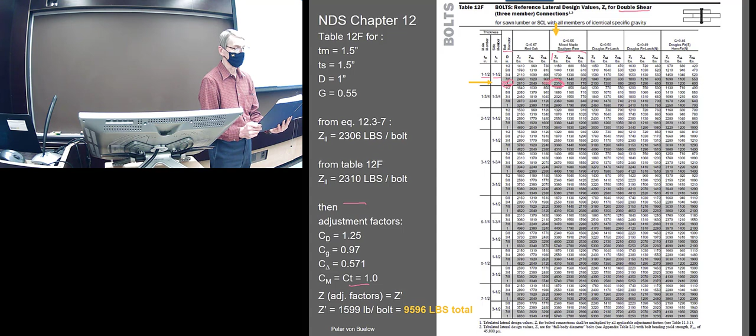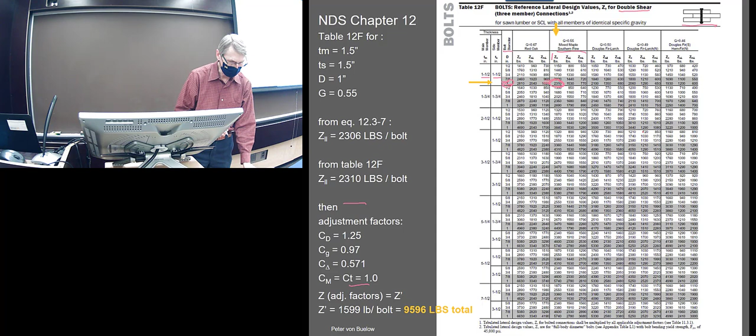Let me see here. Oh, I wanted to make one little comment about where we ended the other day. We went through all those equations, and particularly for the bolt, there are like a dozen different equations you have to check for different modes of failure on the bolt. But in the end, you just have to pay attention to the kind of shear - up in the corner they'll have a picture of it. This is right out of the NDS, actually, it's in this chapter 12.

Sometimes they're single shear - some of them are rated for single shear, some of them are double shear, so they do separate them like that. And then, of course, by the main member and the side member, you have to pick the right sizes. So we did that, and we got a number. And you have to pick your density - this is not really the strength they're looking at, I don't think, so much as the density readings there.

And then you pick a number. That number, I realized afterwards I hadn't really pointed out, does not have the adjustment factors on it. So you still have to multiply that times the adjustment factors, right? So, which you could do, and you get a number then for the total.

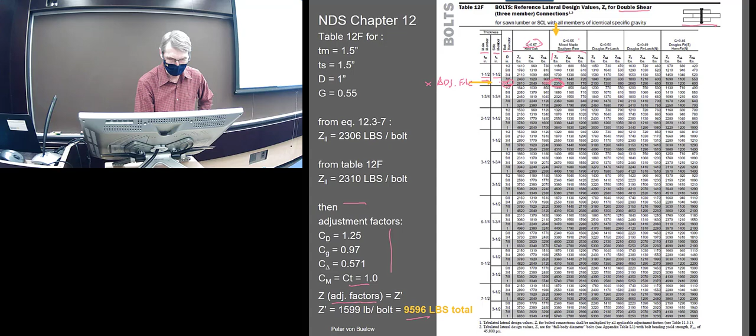This is times the number of bolts, right? Times, in our case, 6 for the bolts. There were 6 on the side.

Okay, so that actually, with the tables, is a very simple thing to check, and those are all the NDS tables, and that's what gave us, I guess, in the end, this. So this was the one that was from the bolts. Theirs is slightly rounded off more than mine. I don't hit their number exactly, but it was pretty close, within 2%.

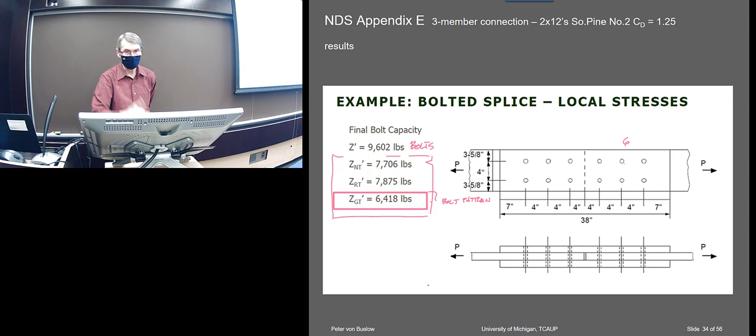And this is the 6 bolts we got that got multiplied in the end. But you look at all these were coming from, I think this was maybe the group tear out, I forget now. But these are the different tear outs, right? These modes are for the pattern, the bolt pattern, not the bolt itself, right, that fails. So it's a lot to check, but there are a lot of different possible modes of failure for that. So that's how that works.

Okay, and then just a few more comments about do's and don'ts. Of course, wood is very susceptible to splitting, and this is one of the main considerations in designing connections, so you don't load it so that it splits.

So, for example, some of the things you wouldn't immediately think about - this right here is not a good way to load that because you can imagine that split right there when you load it, right? It's gonna do that. So it's better to load it from below, let it sit on something. So these would be examples of that.

Here's the split coming from something like that. You have to realize in advance and have the wood sit on the base of it like this. And here they've also got a little pad under it to protect it from the moisture in the concrete.

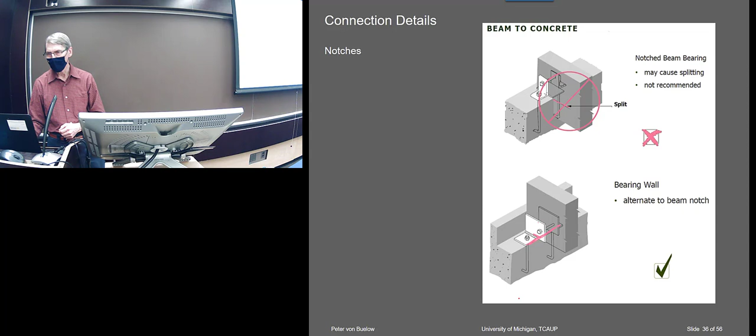I don't know if I told you that story of the Josaphat church I inspected in Detroit - I told you that, yeah. The whole problem with that was they set the sill plate directly on the masonry, and in that case the masonry really did get wet. There was a lot of flooding, and that ultimately rotted out that sill plate.

But anyway, if possible. And then other situations where moisture is a problem - and you see it pretty frequently, I don't know why people don't think of it. Over at Domino Farms, that big long Frank Lloyd Wright building, the roof comes down very low and projects with glulam pieces out along the side, and this is exactly the problem they have. It looks just like that.

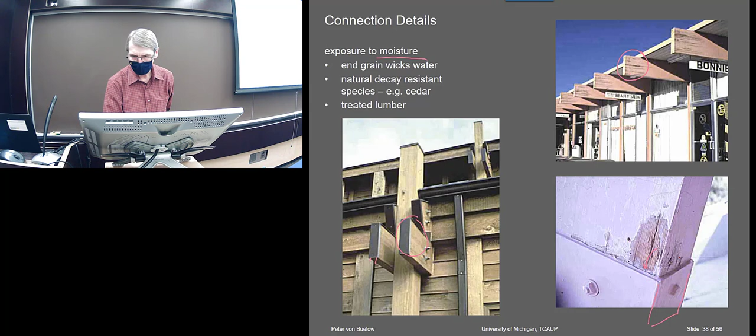And when you design these, you have to be a little bit careful to think of the water getting out. You have to leave some holes down here or something so that if water seeps in, from rain blowing on it from different directions, it can escape. The important thing is you don't want to capture that water - it has to get out. So this was, I think, a column detail, and it undoubtedly captured the water, or the water got in here and couldn't get out, and then starts that rot.

Let's see, here's some other do's and don'ts. This is one where it did exactly that. They've got a bolt at the bottom and at the top. So that's going to potentially cause a split if that wood shrinks. So that's not a good solution. One way to avoid it is to put these slots in. It's a little bit hard to see, these are fuzzy, but you can slot the connection. I think these came from APA, where I got these images.

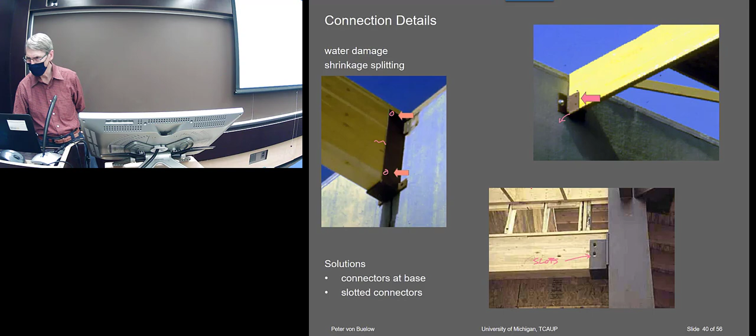These were some other examples. This is a column again with no, it should have some holes down here or something. Simpson now makes some really nice ones, I think they're gauged like for a 4x4, but they have a hollow riser on the bottom that the wood sits up on by half an inch, and then there are holes in it so that the wood's first lifted up off of the concrete, and if water gets into it, it gets back out. So that's a good solution.

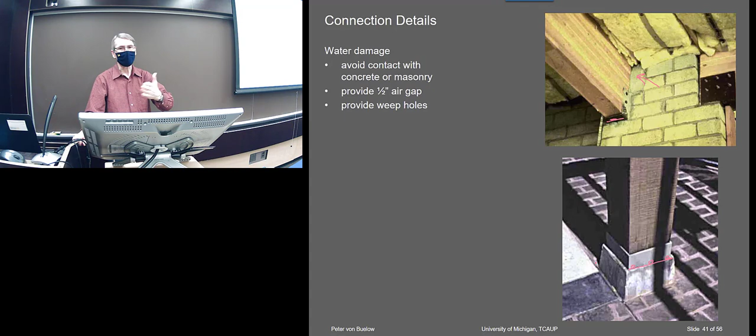They figured that out. This is one that might have been okay originally. It was protected down here, but then somebody filled it in with mortar right up against the wood. So in doing that, the mortar is going to transmit the moisture again to the wood. So that was probably not a good detail. I think APA was saying a half-inch air gap. Okay, wow, that's quite a bit, but there's got to be some gap there for sure.

There's no need to bring that. I mean, it's not strengthening anything to fill that in, but I don't know. Maybe they did it for air drafts or something, or probably just because it was convenient, easy to do, and didn't think about it.

Here's another big one. I think maybe we saw something like this in an earlier slide where they had the column in place and it was fine, and then they cast a floor over it. You'll see this sometimes in renovations where they'd come through and put a new topping on, and not protect the wood. If it's an older structure, it might be a wood frame, and they'll cast on top of that, and that's going to kill the wood. The moisture is going right into the wood then.

These are better details, of course. Keep the slab below the column, or somehow prevent the moisture from getting on it. Or details like this that have a plate again that separates it. Slotted details also allow expansion or contraction.

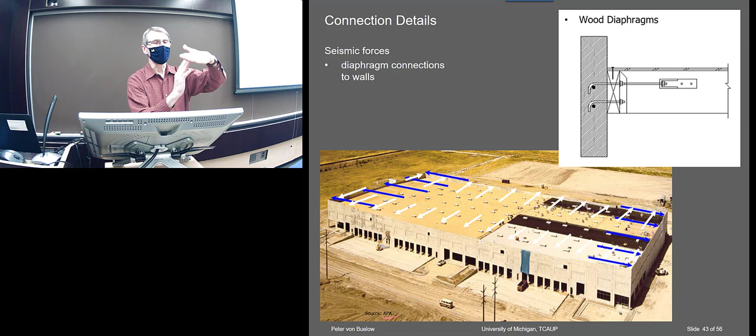These heavy masonry walls are going to move more than the lightweight diaphragm roof. You'll have the roof here, and the inertia from the heavy masonry is going to pull the masonry. So the shock comes, and I guess the shock would go this way. Maybe the masonry would move, or maybe I got it backwards. Anyway, the masonry moves differently than the diaphragm.

And if you've just got them held together, like say you had this plate here and just nailed that diaphragm roof to the support, it would just rip that nail off. It would just pull it apart. So you have to realize there's quite a bit of lateral force in that situation. And what they recommend are these ties, that you have these anchored back into the masonry, and then with multiple fasteners, maybe more than two.

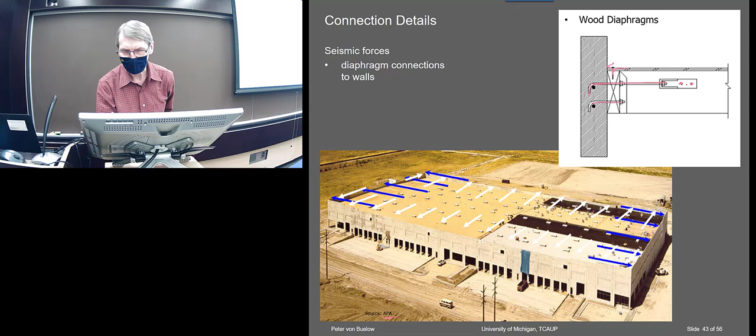In fact, this would be something like one of those fasteners. It's almost like the connectors we saw for shear walls, right? That were doing the same thing. In a shear wall, you've got the wall doing this, right? And you're trying to hold it down. And this is almost the same thing. This wall is pulling away, and you're trying to hold it together. So it's a very similar detail.

And so you've got to have some sort of a connection like that to spread. It's probably more than just two screws. It's probably like half a dozen screws or more that hold that together.

Okay, and talking about shear walls, these we did talk about before. Of course, when it deforms, the panel's going to remain mostly rectangular, and what deforms is the frame behind it. So you get the attachments then ripping apart, right? You've got the panel that remains pretty rigid, and the frame behind it is kind of moving a little bit, and the panels then are remaining square or rectangular, so that it puts a shear force on these edge connectors, particularly more the edge, just geometrically.

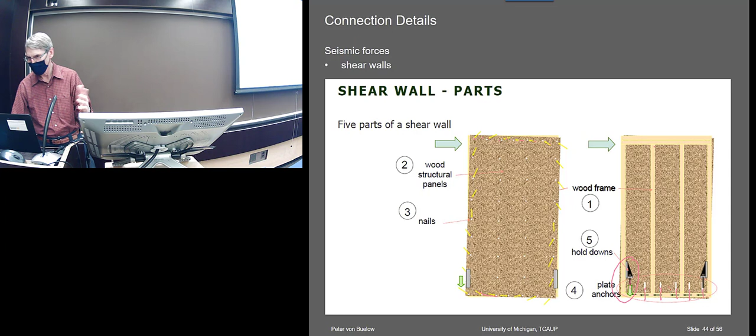So that's a consideration, because there are other options. You can drill it. I think I've got a video at the end here today that shows other options to do those connections. Anyway, okay, so here we go. This just shows a better illustration of why these are the pieces that are carrying it out, right?

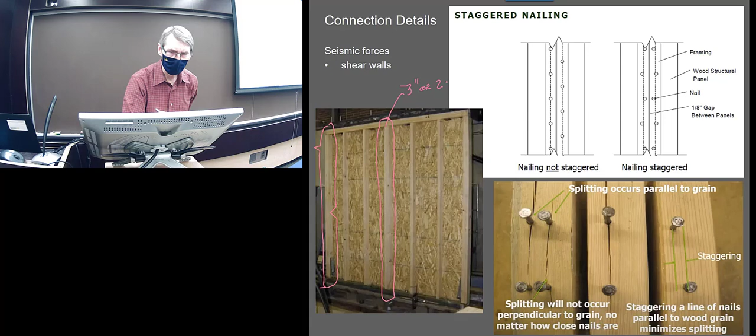The fasteners at the edge, and the sill plate is taking the shear, and then the uplift at the corners. Okay, so that's how those shear panels work. So part of what that was illustrating, these edges are kind of critical, and in the criteria for those, they'll usually say they have to be 3-inch or two 2-inch pieces. Here in Michigan, as far as I know, I don't remember seeing 3-inch pieces very much. Maybe you can order them, but usually they're not available, so it'd be difficult to get a 3-inch piece, but you can use two 2x4s.

And then the nails should be staggered. This was just illustrating what they mean by staggered. This can be a little bit confusing to carpenters, and you may be in the position to inspect it. I don't imagine you'd be out there driving the nails, but you might be walking through inspecting it to see how the job is being done. This is not staggered. Even though it kind of looks staggered, they're not. The critical part is those are lining up in a straight line, and the danger is that if you follow the grain, you'll split it.

Across the grain you can put them as close as you want this way. The grain's not going to split in that direction. But if they line up in this direction, that's a problem. So lining up in this direction is no issue; it's this direction that you've got to watch. It's okay to have them lined up that way. But here is what the stagger's about. It's not a lot of stagger, but at least it hits different grain, so it does make a difference with the wood, trying to avoid that splitting.

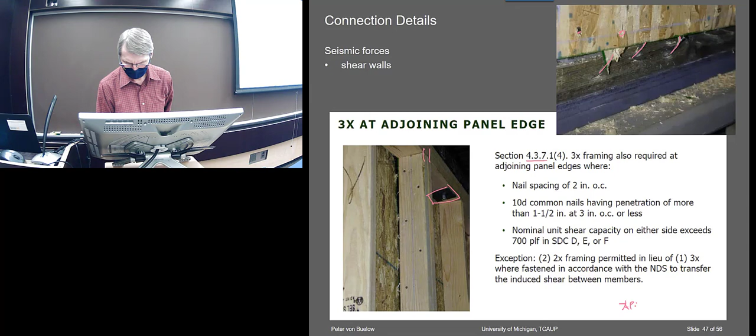Then this just gives the details. I thought this was the NDS criteria, but no, I take that back. This must be more of APA's; I got these out of APA's literature. 2-inch spacing, 10 penny nails. So they're pretty explicit on the details of those. And you can remember when we looked at shear walls, they had the spacing and everything in some of those tables.

They also talk about joining edges. So there's an edge and there's an edge. This is a little bit difficult to stipulate in your drawings. I don't see how you'd really manage that, but you could give it as a written specification and then try to pay attention. It's difficult to see though because it's on opposite sides of the wall, and by the time you get out to the site, it's covered. But if you have staggered joints, then you can just do them on a 2x4. If they line up, then you're supposed to use the 3-inch framing or two 2x4s.

Right? Okay, I gotta get a new pen, I guess. This thing's about illegible.

Okay, so that's another detail. Now, let's see if I got this video here.

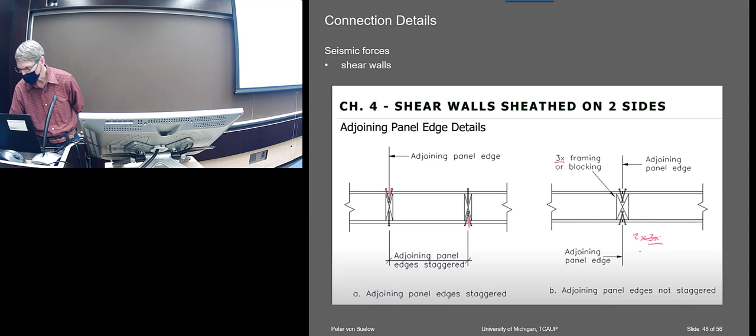You can adjust the spacing. If you got those 2x4s 12 inches on center, that's a pretty strong wall, you wouldn't need to go to a 2x6. But the 2x6 gives you a larger plenum, a little bit of space, which for plumbing would be useful. What I hadn't really thought about, but what this guy was pointing out, is people do it in higher priced homes to put more insulation in there. You have a thicker panel to have more insulation, and his argument is that's not a very good way to do the insulation.

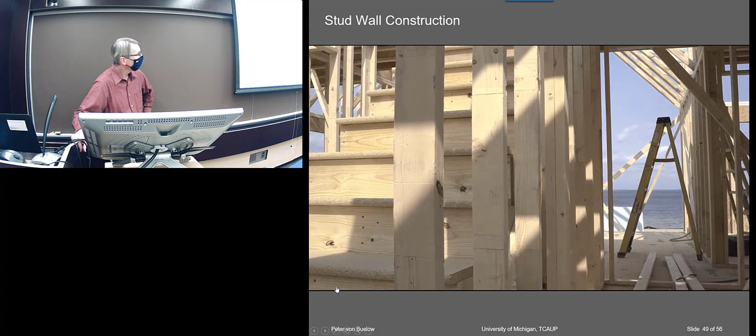I'm just getting a regular stud, and if you've ever gone through a bunk of studs, you'll see you got to throw out probably 30 or 40 out of each bunk. My worry is one of those gets in the wall, and then we've got a problem. If it's in your kitchen, your countertops and cabinets don't want to sit right, because it's typically warped.

That's why I've stayed with a 2x4. The value of going to a 2x6, I know, is you've got a bigger wall cavity so you can get more insulation in there. But what typically happens is when you put that insulation inside your house, they're not putting it on the outside like we do. We typically put an inch of styrofoam on the outside of our house, and the reason I like that is it performs as a thermal break, so you don't have the heat going from drywall to your stud to your OSB on the outside and right out of your house.

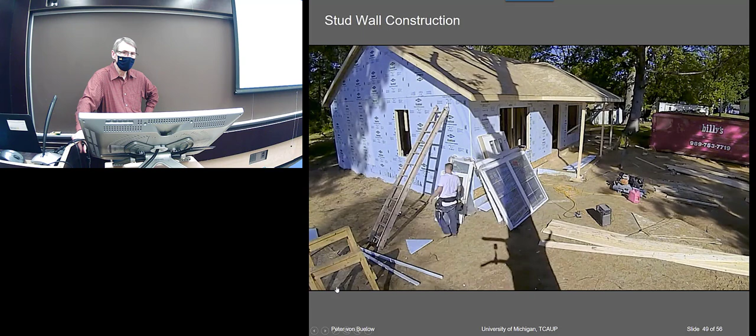If you've ever driven around on a frosty morning, you can tell who doesn't have a thermal break because you can see every stud in their siding, because it's collecting that heat. So that's another reason when you see people build with 2x6, they typically just put a house wrap on the outside because they've got their R value already inside their wall and don't want to spend the extra money on the styrofoam. But that thermal break, I think, is really important energy-wise, you're not soaking energy right out of your house.

And the other comment he made about the finger jointed lumber, I had never really considered that, but apparently that's more stable in terms of warping or deforming.

It's very true. I've gone down to Lowe's trying to buy 2x4s, you pick them up in the pile and go through them and they're not straight. It's hard, you have to sort through them to get a straight one. The problem is you put them up in a wall, and if they're too bad, you've got a bump in the wall. You'll either notice that, or like he was saying, in a situation where you're putting cabinetry around, it can actually be a problem, and then you've got to come back and try to fix that. I think another video I have later shows ways to fix that, but it's kind of a nuisance for sure. It costs you labor to fix it.

Okay, these are some more. Oh, this is out of the IRC and the IBC, the International Building Codes. Their details also have stipulations if you look in there, and usually they just reference the NDS, or they're at least in agreement with them. They had a few details that I noticed that were specifically on joinery.

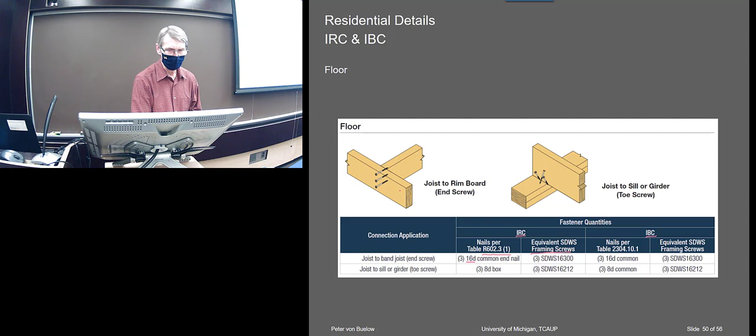Here they're specifying - oops, okay, sorry, let me get back to my pen - they specify the nail size. There's a table giving those nail sizes. They also give equivalent screws if you want to use screws, and they pretty much agree. This was a comparison between the residential code and the International Building Code, and they'll stipulate how those are actually used. So this is just on a floor. This is rim board, of course, screwed or nailed into the end of that.

Get long enough screws. These are details on joining of the top plates. Normally we have a double top plate on a stud wall, and this shows how to do the lap splice. The sole plate is toe-nailed in, and the top plate as well. Again it's giving you the size of these fasteners, most of them 16 or 10 penny. 16 is pretty big - I guess the ones being toe-nailed are usually 16 penny because they have to go through a further distance.

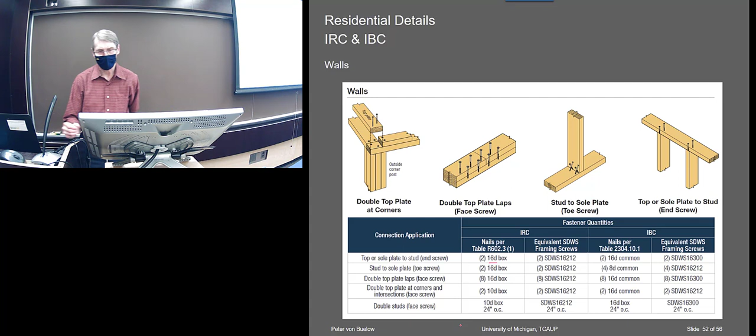Details on rafter construction and that kind of stuff. It's similar, and I guess the most interesting part of these tables to me is seeing what they stipulate as the size of the connectors. I think there's one more - yeah, these are just details on roofs.

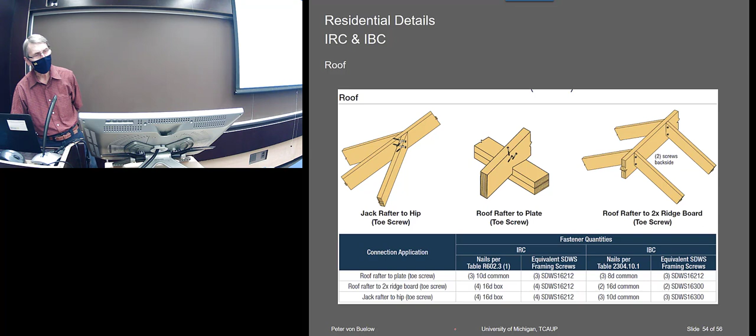And then this was the other video I thought I'd show you. This is from Simpson - let's see if we get my pointer arrow working. This goes through and shows a series of their connectors and examples of in-use applications.

Hello and welcome. Simpson Strong-Tie leads the industry in product innovation, quality, and technical support for structural connectors. In this short video, we'll cover the basics for correctly installing Simpson Strong-Tie connectors. Effectively utilizing these connectors not only makes construction more efficient, it creates a stronger, safer, well-connected structure.

First, making a good connection requires having the right connector. The right connector should be chosen by your architect, engineer, or designer. Our job is to be sure that it is installed correctly. Once the correct connector has been determined, the single most important factor in correct connector installation is the proper use of fasteners. So let's take a look at some of the fastener types used with Simpson Strong-Tie connectors. Depending on the kind of connector chosen, you may use nails, machine bolts, strong drive screws, or Titen masonry screws. But it's more than just the type of fastener that's important for proper connector installation.

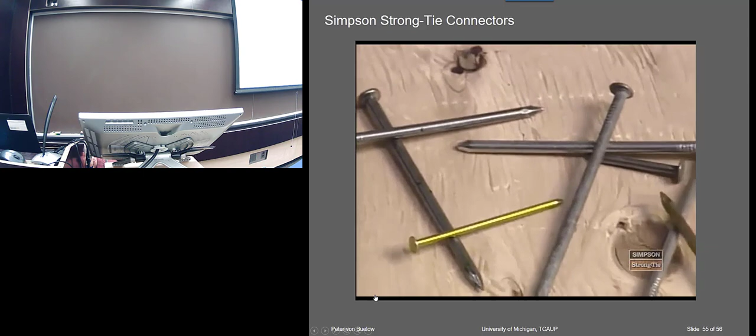So let's look at the most common fastener used with Simpson Strong-Tie connectors, the nail. There are many different types of nails, so make sure you're using the correct one. Fortunately, most Simpson connectors have the required nail stamped right on the product. But if you're unsure, simply refer to the current Simpson connector catalog. Although two nails may look alike, there are three key features of a nail that will affect the performance of a connector: diameter, length, and finish.

The diameter of the nail shank, often referred to as the gauge of the nail, affects the shear capacity of the nail. The thicker the nail, the more shear resistance provided, so be careful - substituting a nail with a smaller diameter shank will reduce the load capacity of the connection. Here are some common nail types with their associated diameter and wire gauge.

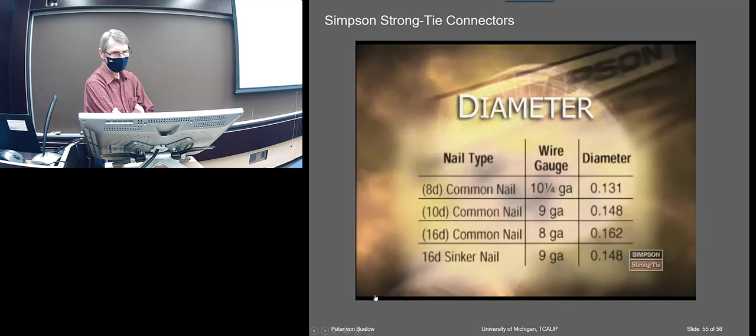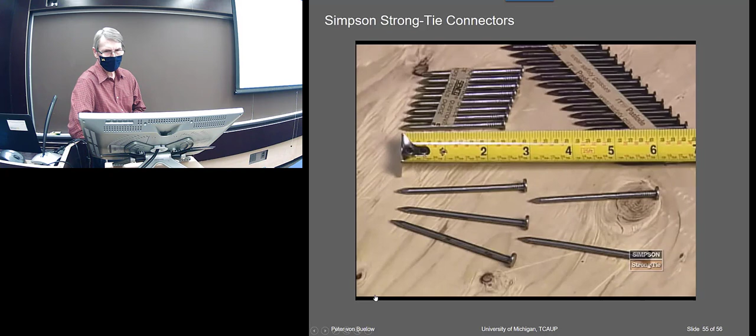The length of the nail is the next most important factor in determining the connector capacity. The reason is simple: nails must have enough penetration into wood to achieve full shear capacity. Here are some common nail types with their associated lengths. Some connectors require full-length nails and cannot use shorter versions. Examples include hangers with double shear nailing and some heavy top flange hangers like the HGLTV. For other products, substituting a shorter nail will result in drastic load reductions. Never use short nails without first verifying whether they will work. Here are some common nail types with their associated minimum penetration lengths.

When using our patented double shear nail hangers, you must use the specified full-length nails. And finally, consider the finish of the nail. Galvanized or stainless steel nails may be required for corrosion resistance. Check with your local building department for specific code requirements.

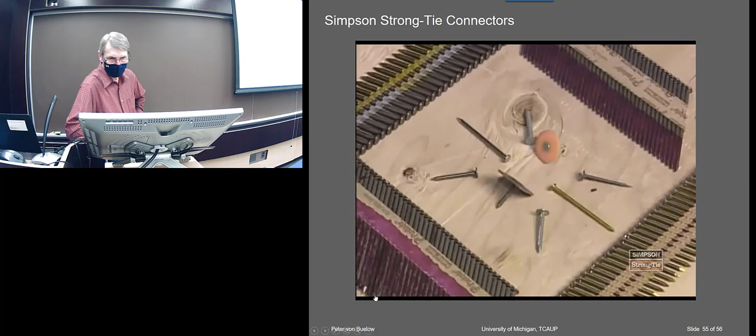It's important to realize that many nails found in lumber yards are not appropriate for use in connectors. Examples include drywall or sheetrock nails, roofing nails, and small common nails like the six-penny nail. These nails lack either the length, thickness, steel composition, or coating needed, and they substantially reduce the load capacity of your connectors. Remember, the incorrect use of fasteners is the single most common mistake made during connector installation.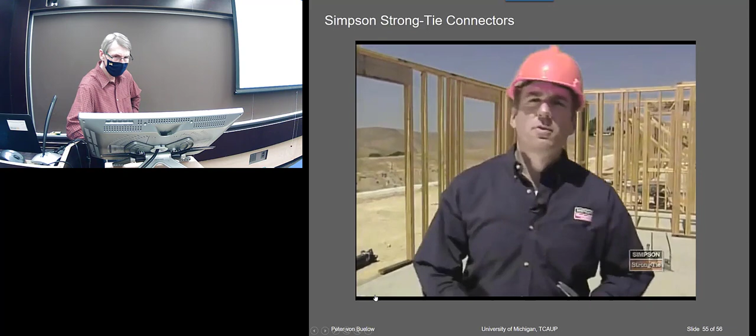Now that we're aware of the importance of using the right nail for each connector, let's talk about installing those nails. A metal claw hammer is still the tool of choice, but palm nailers can also be used, and are a great way of reducing installation time when used with the correct nails. Some pneumatic nailers can also be used, provided they have a nail hole locating mechanism and they use the correct nail for the connection.

Do not overdrive the nails. The nail head should be seated flush with the steel. Keep in mind that most standard framing nailers cannot locate holes and therefore should not be used to install nails into connectors. And since most collated nails for standard framing nailers are undersized, they should not be used to install connectors.

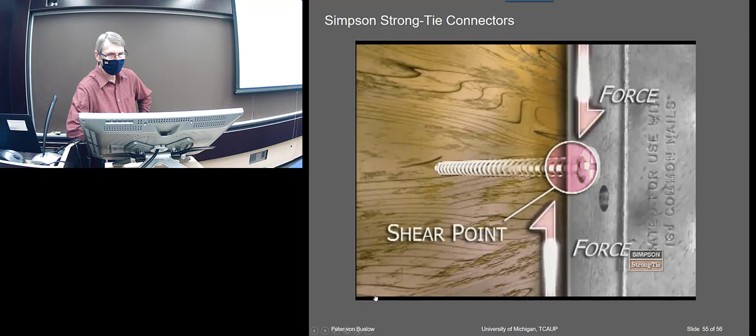Now let's talk about screws. Since screws act differently than nails, they cannot be interchanged. Screws are often tempered, which makes them brittle, and therefore will not yield the shear strength that nails provide. Examples of common screws not suitable for connectors include drywall screws, deck screws, and lag screws. But Simpson makes a patented screw called the SDS, or Strong Drive Screw, that is code listed, needs no pre-drilling, and comes with the connectors that require them.

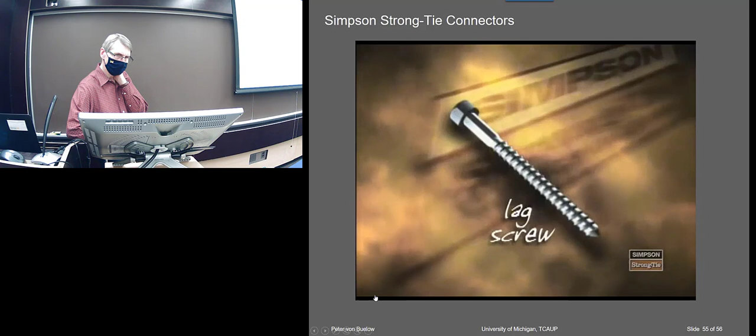But beware, do not mistake an SDS screw for a lag screw. A lag screw will not achieve the same loads as an SDS screw and is not allowed with Simpson Strong-Tie connectors. And finally, for those connectors designed for use with masonry screws, remember to pre-drill those holes to the required diameter and depth for correct installation. The drill bit diameter can be found on the packet of screws, and it must be drilled at least 1/2 inch deeper than the screw length.

Now let's talk about machine bolts. They should of course be pre-drilled to a diameter only 1/16 of an inch larger than the bolt itself, and they require a washer on the wood side of the connection. Carriage bolts, lag screws, and all-thread rods cannot be used in place of machine bolts. It's important to remember, a pre-drilled hole that's too big for the bolt will compromise the integrity of the wood and make for a weak connection.

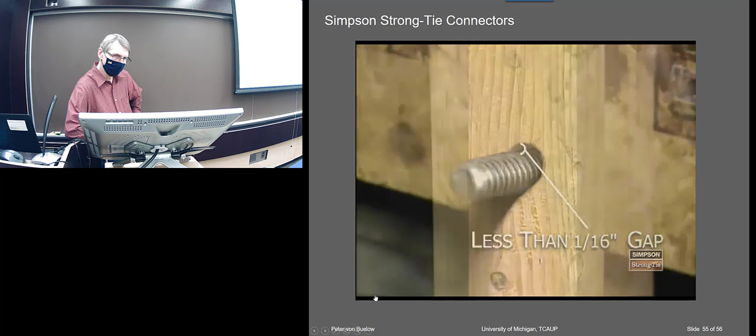Since repairs for poorly drilled holes can be costly, make sure the drill bit is of the right diameter, it's not bent, and you drill the hole from one side. Don't try to meet the hole in the middle by drilling from both sides.

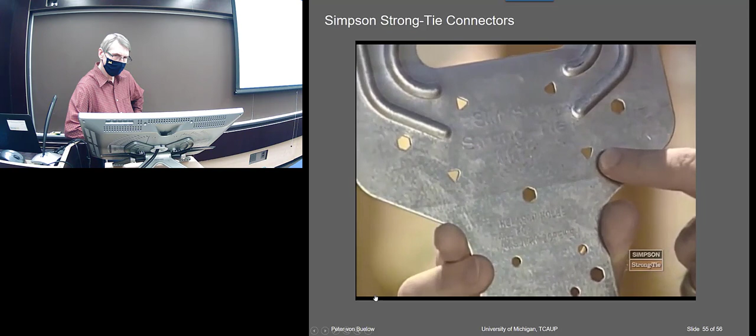You probably noticed that Simpson Strong-Tie has different shaped holes throughout its product line. You'll see round, oblong, triangular, diamond, and hexagonal shaped holes in our connectors. But what do these different hole shapes mean? Well, each different shape indicates a different fastening requirement.

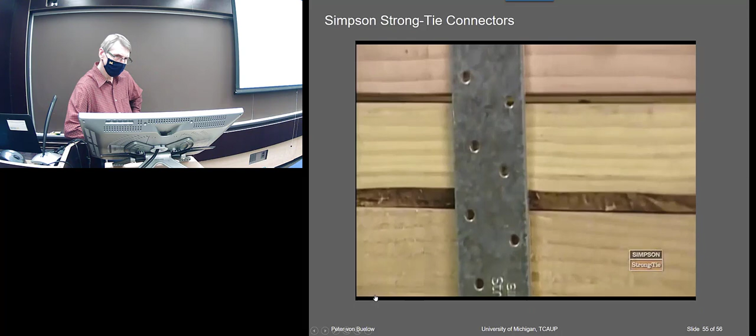The most common shape is the round hole. This hole must be filled with the fastener type specified. The only time you may not fill a round hole is for straps and strap type hangers. These products have more holes than are required to allow for multiple fastening capabilities. Oval or oblong holes are simply used to provide easier access in tight locations and should be treated like round holes. As a general rule, all round and oblong holes should be filled with the appropriate nail.

Triangle holes are used for increased capacity and must be used if specified by the designer. Connectors that have triangle-shaped holes have a minimum and maximum load value. To achieve the minimum load value, you must fill all round holes. To achieve the maximum load, you must fill all round and all triangular holes.

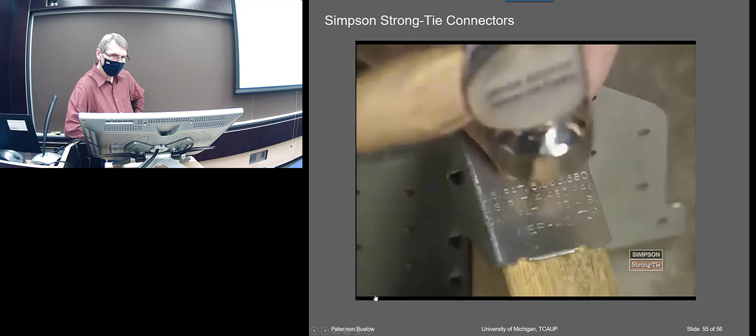Diamond-shaped holes indicate a temporary fastening option and are there to aid installation. It is not required to fill diamond-shaped holes. Hexagon-shaped holes are used exclusively in conjunction with our Titen masonry screws, and these holes must be pre-drilled.

Along with different hole shapes, Strong Tie connectors use a variety of innovative design features to help secure their connectors with greater efficiency and more precision. The most common of these are the patented tabs and domes. Both of these features force the nail at a 45-degree angle, providing correct installation of our double shear nail design.

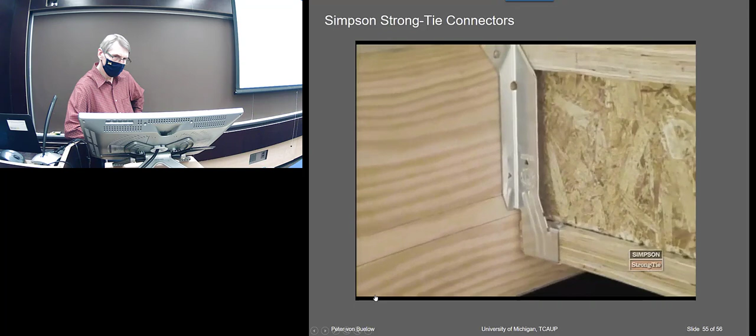Simpson also uses this 45-degree feature with engineered wood product connectors, commonly known as I-joist hangers. This application is referred to as PAN, or positive angle nailing, which forces the nail into the wood at a 45-degree angle, minimizing wood splitting problems. Other I-joist hangers feature a bend tab that locks the hanger to the bottom chord of an I-joist, preventing joist movement and minimizing squeaks in the floor system. Simpson's newest design, the IUS, features a snap-in seat requiring no joist nailing for the fastest possible installation and huge labor savings.

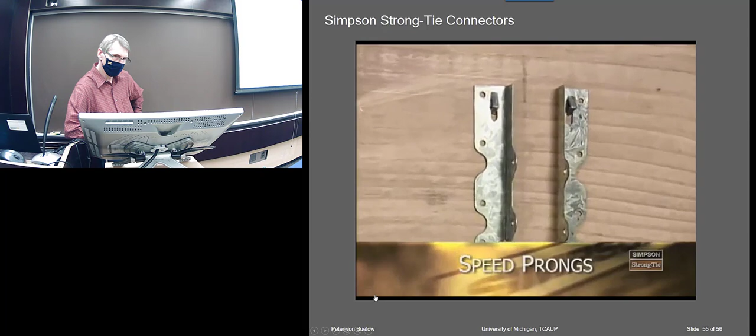Speed prongs are another Strong Tie innovation found on many of our connectors. Since it can be difficult to hold a connector, hammer, and nail all at the same time, these handy prongs are used to temporarily position and secure the connector for faster, easier installation.

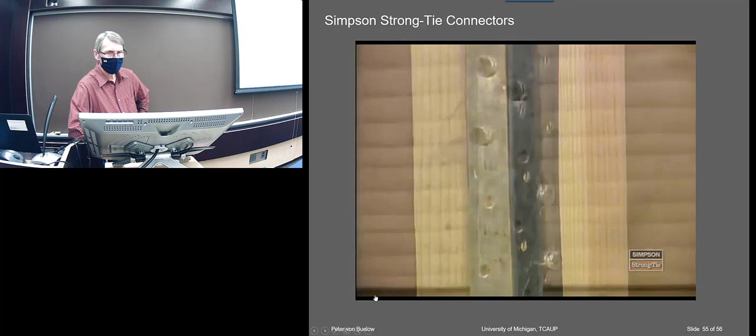Now that the connectors are installed, it's a good idea to check your work. First, verify that all the appropriate holes have been filled with the specified fasteners. If this has not been done properly, it could result in a premature failure of the connection, which may create a life-threatening condition. Once you have determined all required holes have been filled, check both parts of the connection to ensure fasteners are installed into appropriate material, like lumber or masonry, and not into thin air.

So let's take a moment to recap what we've learned. First, we know how important it is to verify that we have the right connector for our construction plans. Second, we learned how important it is to use the proper fastener for those connectors. We learned that nails must be the correct length and diameter, and don't forget to check local agencies for any special corrosion considerations.

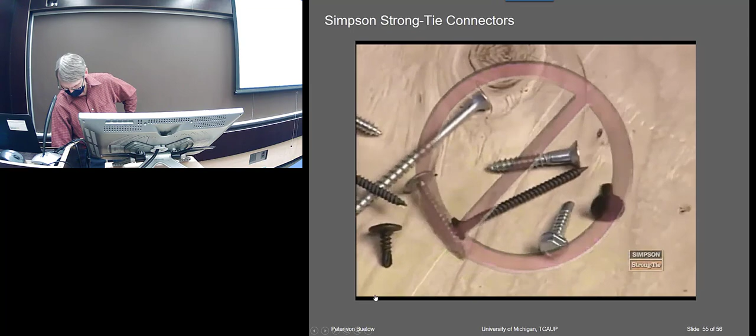For screws, we know that Simpson Strong Tie offers two types of code-listed structurally rated screws, the SDS screw and the Titan masonry screw. The SDS is code-listed as a self-drilling screw, but remember, a lag screw is not an acceptable substitution for an SDS. And because of the base material, it is necessary to pre-drill for proper installation of the Titan masonry screw. We also learned that machine bolts must be pre-drilled to a certain tolerance, and that a carriage bolt or all-thread rod may not be substituted for a machine bolt.

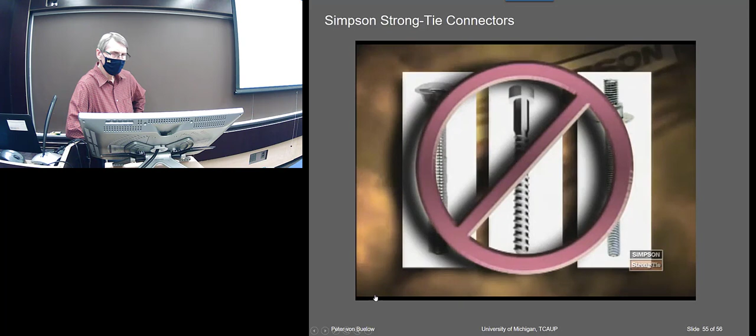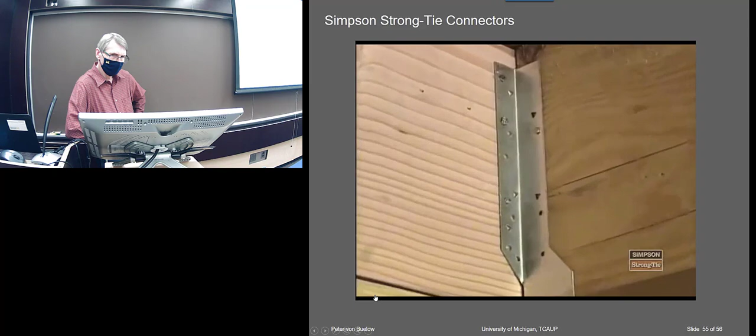In addition to the proper fastener, we know how important it is to use the correct quantity of fasteners. We learned the significance of all the different hole shapes and design features, each representing a different requirement or feature. We learned about innovative features like tabs, domes, pan nailing, and speed prongs, all designed to aid in proper installation. And finally, Simpson Strong Tie connectors can only be as good as the base material to which they are fastened. Make sure that the material is suitable for fastening and will support the load developed by the connector.

After all, Titans, SDSs, and nails can't work if they're not fastened into adequate material. If you're not sure or it's not stamped directly on the connector, remember, all fastener types and quantities can be found in the current Simpson Strong Tie catalog or on the web at www.strongtie.com.

Okay, there's Strong Tie. Yeah, it is interesting there. In terms of inspecting, it makes it very easy to see which holes are not filled. And one comment they had, I don't know if you caught it, where they nailed on the truss where it was not attached, the nails went in but didn't hit the wood, right? They missed the wood. Of course, that's not too good. But the other one was on the insulation, trying to nail through insulation into the wood. Well, that's going to leave that much of the nail unsupported, right? So that's not a good solution either. So, I thought that was an interesting video, a few good do's and don'ts. And oh gosh, we're going to finish early today, I wasn't sure we'd get to this.

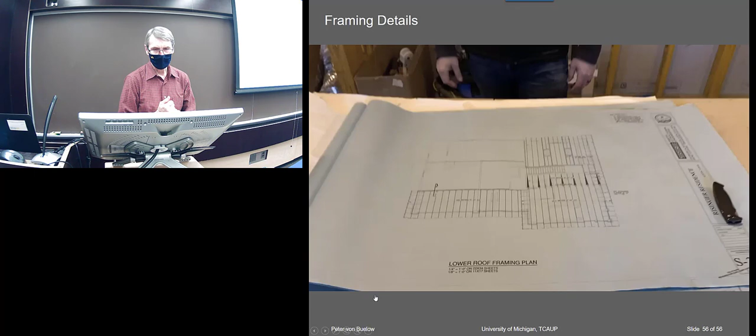This is one other video that I thought was good because he goes through also talking about not just the fasteners, but mentions how to solve some of the details where the wood walls are not straight. You know, that other builder was commenting that he used finger jointed lumber to get straight pieces. And this, they talk about that too here, and how you actually, what you'd have to do if they're not straight. Anyway, this is that guy we saw one of his videos earlier on the Risinger homes. He did the video on the different, what was it, plywood versus OSB, I think. Okay, so let's see if I can get this to play.

The Build Show today, talking about engineering. We're at my house under construction, and I used a couple of very special products that made my house especially strong, but also made it a little easier on me and the framers for construction. We're going to be talking about new construction and remodeling, some tips and products that I think will help you on your next build. Today's video is all about engineering. Let's get going.

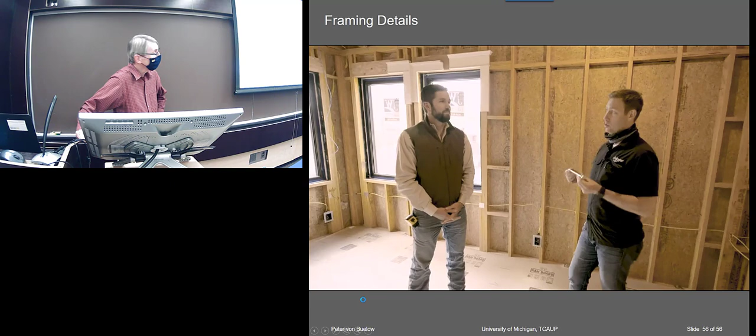All right guys, I got my friend Whit Smith here, the engineer who has worked with me on a bunch of projects in my personal house too. Whit, let's talk about some of the modern hardware available and some of the things we did on this house to make sure, number one, my house was structural, but also to make some of the construction easier.

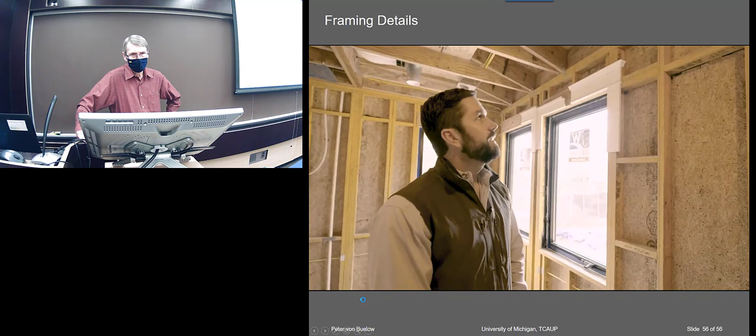So first off, Whit, talk to me about those metal ties going from the top plate to the rafters. Well, these are hurricane ties, and that's how we attach the rafter to the top plate of the wall. And that's not something that's all that new, we've been using those a long time, it's been a couple decades. Most of our framers are going to be very familiar with that. What we're trying to achieve by attaching the rafter to the top plate is a continuous load path to resist wind uplift. So as the wind's trying to grab that overhang, it's holding that roof down to this wall, right? That's correct.

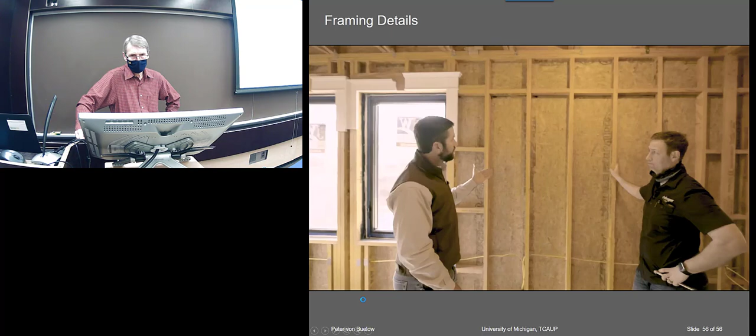And then to maintain that load path, we have to attach the top plate, because eventually we want it connected to the foundation. So we're going to attach the top plate to the studs using our continuous sheathing. As an engineer, we love continuous sheathing because we have shear strength and resistance to uplift throughout the entire home. So shear strength meaning that racking, like when the wind hits one side of the house, it's resisting this kind of movement, right? Exactly. But then this is also helping us with uplift too, is that right?

That's correct. So our sheathing is going to now be attached to our double bottom plate. In this case, it's a double plate due to our floor detail. And then we have to attach the bottom plate to the foundation.

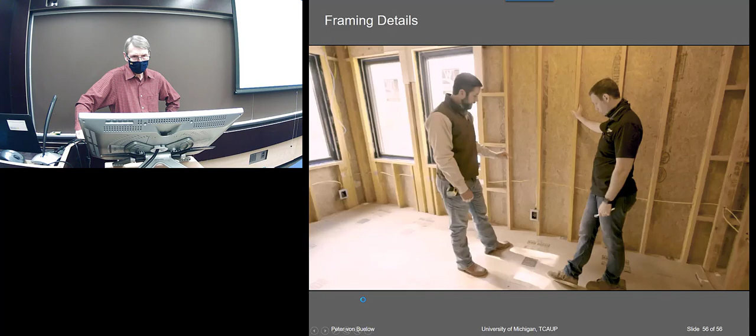Okay, so this is a remodel house with... This was originally a 70s slab, and we've got some new framing on it. When we took the house apart, I realized the bottom plates were power actuated, basically a nail that's shot down through the concrete. But a nail, in effect, that wouldn't give you enough value to hold the house down, is that right? That's correct. And in fact, that doesn't meet code. That's how we would attach an interior wall, but an exterior wall requires half-inch diameter J-bolts most commonly.

In new construction, you're going to see a half-inch diameter J-bolt, or there's a new line of products out that they call mudsill anchors. That's similar to a joist hanger, a light gauge metal hanger that you attach to your concrete form. So you install them before you pour the concrete, wreck your forms, and then you lay your plate down and attach it using that mudsill anchor. It kind of folds over. Exactly.

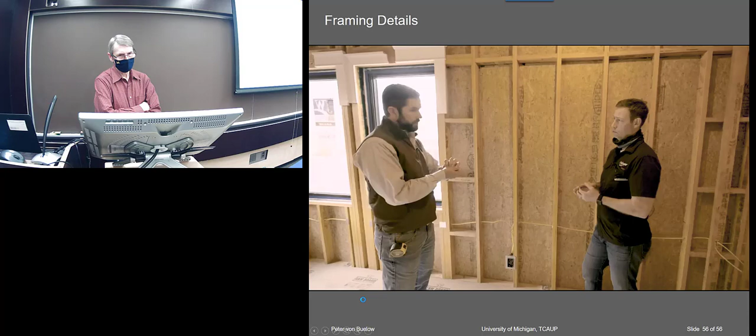Okay, I've seen those. Now that wouldn't have worked in our application here because our foundation was existing, so we had to post-install our anchor bolts. Fortunately, Simpson has options for post-installed application in a 2x4 wall. And what's that product called, Whit? This is a Titan HD, a heavy-duty screw anchor.

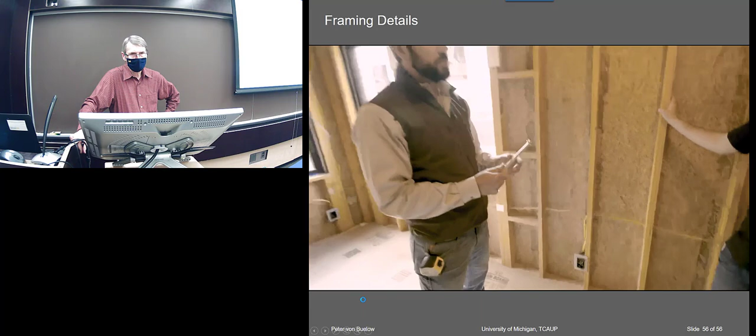And the challenge in attaching a 2x4 wall to the foundation is we're only 1 3/4 inches off the edge of the foundation, so not all hardware is going to work in this situation. This one specifically is approved to install a 2x4 plate to our foundation on the edge of the foundation. Some of our other options might have been wedge anchors or epoxy set anchors, right? Epoxy for sure, I know that's an approved solution. I'm not sure about wedge anchors, because the way a wedge anchor is installed, when you tighten it, it actually exerts an outward force on the foundation.

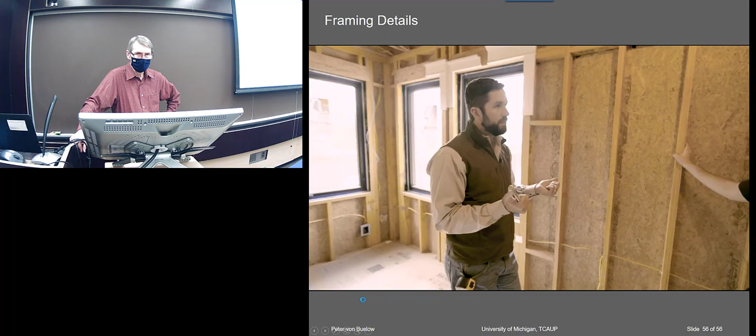So that might be one that doesn't work. So if we're that close to the foundation, that probably wouldn't work because we might bust out the concrete with that pressure against the sidewall, right? That's correct. That makes sense. Now what else I like about this is it does not require a washer necessarily. It has a built-in washer.

Most J-bolts are going to require a washer when you install it. And I can see here we installed a washer, which I would consider to be an upgrade. Yep. This is not something we see in all of our homes. So this big fat piece of metal right there with a slot, by the way, wasn't necessarily required in my zone because I'm not in a particular hurricane or seismic zone, right? That's correct. Now in a high seismic or a high wind zone, you are required to use these larger washers.

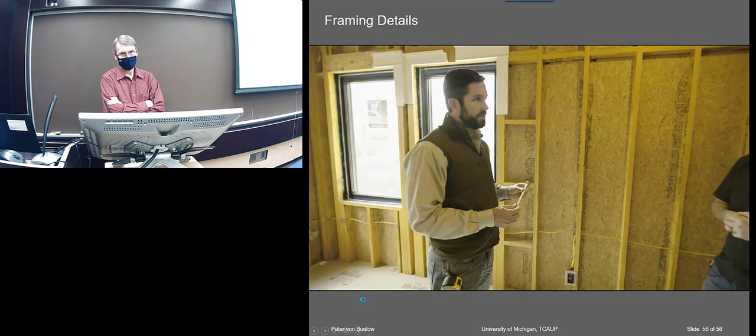Okay, gotcha. All right, Whit, so on those Titan HDs, talk to me about spacing on those, whether you're using those or any other anchor. Yeah, the spacing is going to be the same for these, whether they're cast in place or post installed, and the code requires a 1/2 inch diameter anchor, spaced 6 feet on center. Now, I would say the industry standard is to space them all 4 feet on center. That allows a little wiggle room, a little room for error, and not too much additional cost throughout the course of a project. That makes sense.

The other thing to know is we have to install an anchor within 12 inches of a corner, but with these, it's not closer than 6 inches. And with a regular J-bolt, you should be not closer than 7 bolt diameters. Okay. So a good rule of thumb is 6 to 8 inches from a corner.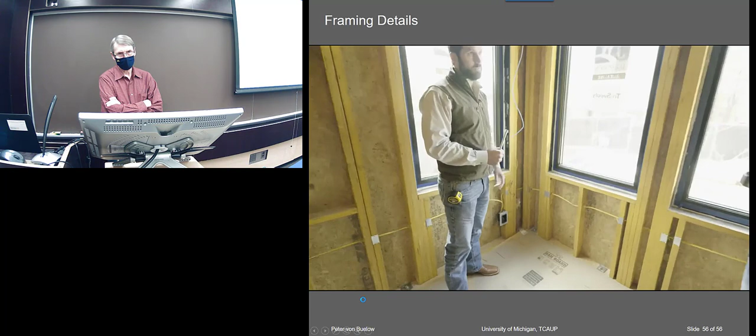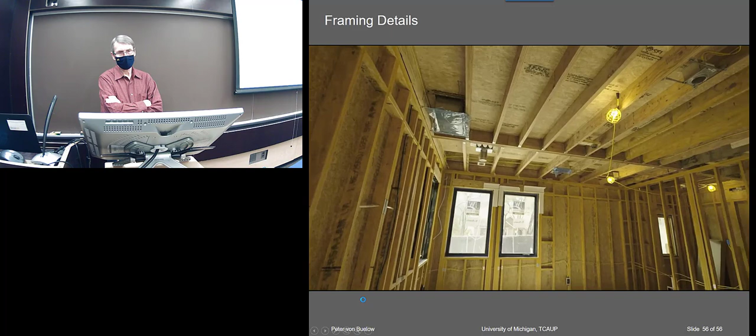I gotta say, Whit, when the guys came to install these for me, they were really easy to use. All we did was we post drilled them. In fact, you can see a little bit of the concrete dust on the floor right there from where we drilled them. And with our Milwaukee drills, all battery operated, they were super easy. Now the first floor in this house is about 1,600 square feet. We easily did it with 2 guys in a day, including the garage space as well. That's great. So pretty straightforward.

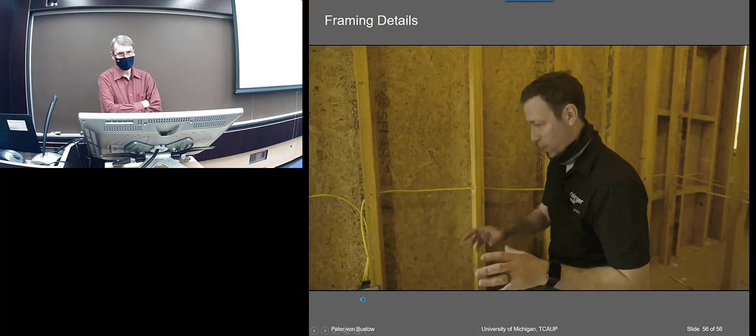The other benefit of these over J-bolts in my mind is we actually did pour one new section of concrete, and all my J-bolts were right where my doors were. So we had to come back and saw them off. So by placing these after the fact, even though this was kind of a hybrid, mostly remodel with a little bit of new, it was sure nice to just go back and go, all right, where do we need them? What's the engineering on this, or what's the code on this, and boom, drill them and anchor them. Rather than having the concrete guy think about where's the framing, where's a window, where's a door, that sort of thing.

What else I like about these is they're removable. So if you install one in an incorrect location, you can always back them out just like you would a screw and relocate them. That is pretty nice.

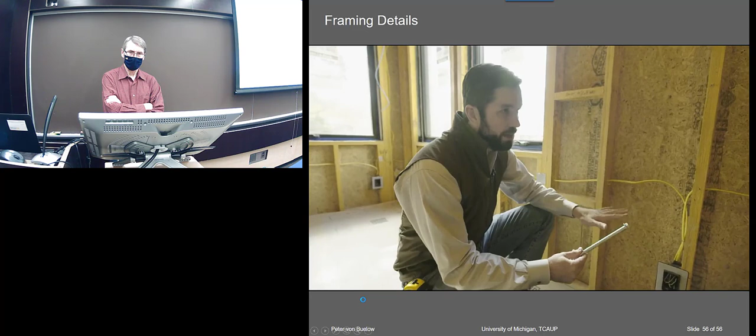And talk to me about length real quick, Whit. Do they need to be this long? Code requirement for a J-bolt is 7 inches into the foundation. Now the Titen HD 1-for-1 replacement, you only need to extend 4 1/4 inches into the foundation. Oh, wow. So typically with a single bottom plate, you could use a 6-inch anchor. In the case of your home here, where we have a double bottom plate, we had to use the 8-inch long anchors to satisfy the code criteria. Because I got 3 inches of wood to go through before I even get to the concrete. That's correct. Yeah, got it.

Good stuff. Whit, let's go talk about some specialty hangers that we use. I'll meet you over in the living room. All right, Whit, let's talk hangers. Now, everyone's familiar with a traditional joist hanger. We use some hangers here, though, that are pretty serious and something I'd never seen before. Will you talk to me about these we used here? Yeah, this is something I'm only becoming familiar with. It's still relatively new on the market, but I've been really impressed with it.

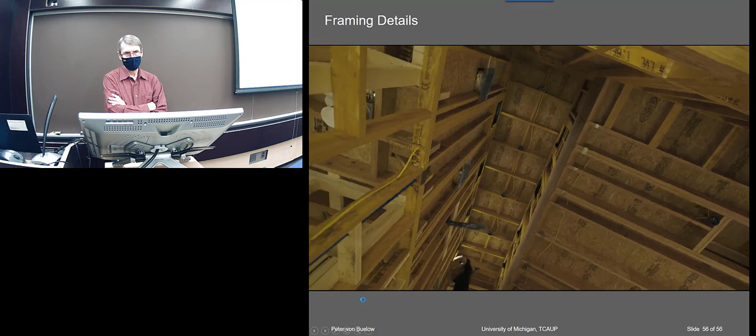This is a slopable, skewable face mount hanger. Damn. So where we would normally have to come in and cut a seat for the rafter to sit in the face mount hanger, we don't have to do that here, so it allows us to keep that ceiling plane flush all the way out to the edge of the beam. Yep. And still get the load support from our face mount hanger.

There's a lot of load on there. Isn't that a double 24-inch tall LVL beam up there? It is. It's spanning a long ways, has quite a bit of load on it. It's supporting our light well up over the stair, plus all this roof here in the living room. Yep. And we're always very conscientious about limiting deflection. So the best way to do that is with deeper framing members. So here we have a 24-inch LVL beam supporting this roof.

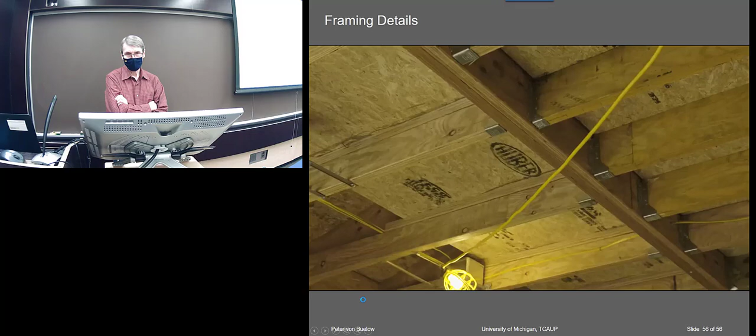Now, we used LVLs here in this framing, but could I have used 2x10, 2x12, something like a traditional solid sawn lumber in here as well? We could have, and that's a common use of solid sawn lumber. However, if we use LVLs, we have a flatter ceiling. We can have reduced member depth to keep that ceiling profile not as thick. And they're stronger. LVLs are stronger than solid sawn wood.

Yeah, and then ultimately probably a little less deflection too, right? Especially when we get a fairly long rafter like these going. Exactly. And that's going to be very noticeable when you walk up the stairs and turn around and sight down that ceiling. Any deflection at all, you would see it. Yeah, you're going to see that. And I'm doing all level 5 smooth here too, so I don't have a lot of texture or other things to hide those sins with shadow lines.

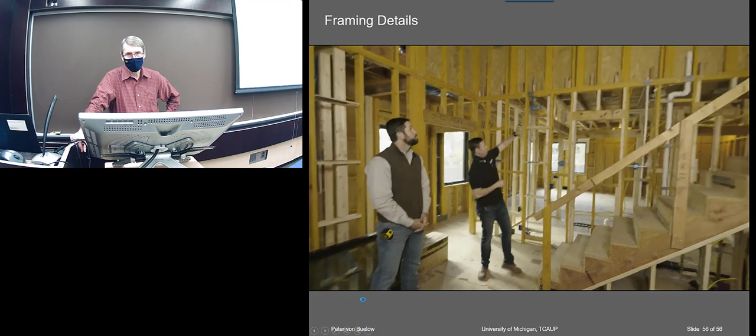And then we also use 2x4 LVL studs on this house. I'm sure someone watching this has never seen those before. That was a spec for me where I said, hey, I want to use this. Well, I've done one house before with them, but I was really wanting to try them for flatness and straightness. What do you think about them after you've seen them here and looked at the engineering on them?

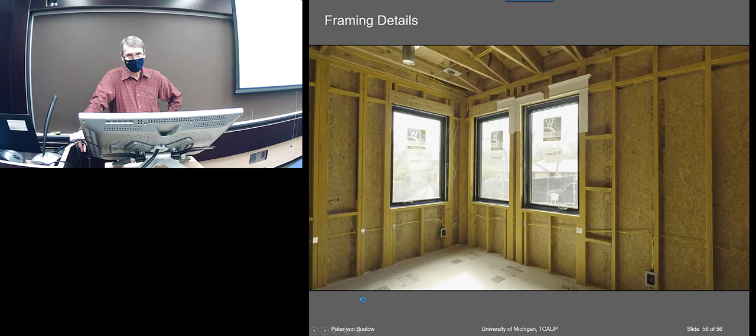Well, we're always a big fan of engineered lumber. It's more dimensionally stable, it's stronger. In this case, you have a wider nailing surface. They're wider than a 2x4 stud, and they always have more structural strength than solid sawn wood. Yeah, and I love that there was no cull. Every single stud we took out of the pile we used, there was nothing left over, nothing to send back to the lumberyard that had some bow or wane or issues that caused us to cull it out of the stack.

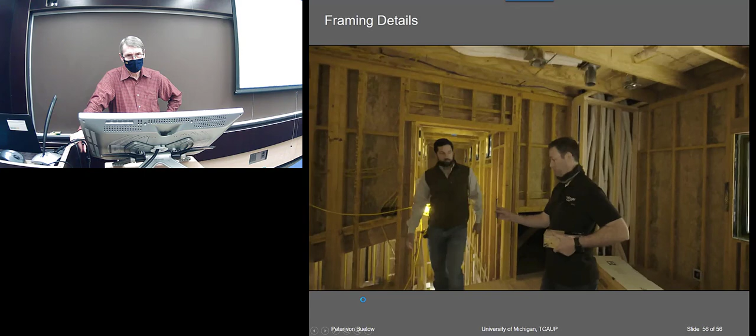Whit, let's go upstairs and finish up the video talking about some screws that we used. All right, Whit, let's finish off the video up here where we used a version of this screw. This is kind of, for lack of a better term, a TimberLOK. That's actually a different manufacturer than Simpson. But as far as I know, they were the first in the category, and a bunch of different people, Simpson, Spax, FastenMaster, make some of these. What are these originally intended for?

Well, they have a lot of different uses, but at the end of the day, they're meant to replace a lag screw. So this, you don't have to pre-drill. Most of the manufacturers advertise this diameter screw, it's close to a 1/4 inch diameter, as being able to replace a 3/8 inch diameter lag screw. Oh, that's nice. So we can install this screw, no pre-drilling, and get high load values. It has many uses. It can be used to attach ledgers. It can be used to attach multiple plies of engineered wood, such as LVLs.

It's kind of funny, as you're talking, I'm hearing the guys using one outside right now. Yeah, so you can hear how they're installed. Impact driver, they go right in.

Yeah. High load values. I recall earlier in the year we were using them to attach our ceiling joists together when we were building what we were considering to be a 3-piece truss. Yep. And we had to connect the bottom collar ties, the bottom ties together. Yeah, so basically these LVLs that are next to each other, we're stitching them together with that lag. That's correct. And that's kind of making this truss design that we made into my ceiling here.

The beauty of these, I think, from a builder's perspective, is that there's no pre-drilling, no having to make a pilot hole for these. That's huge. For production, all we do is grab an impact gun and just drive those things in. Agreed, much easier. I'm also a fan of the large head on them. Yeah, because you're really catching the wood and you're forcing that together. You're not worried about, oh, did they put a washer on that screw, right?

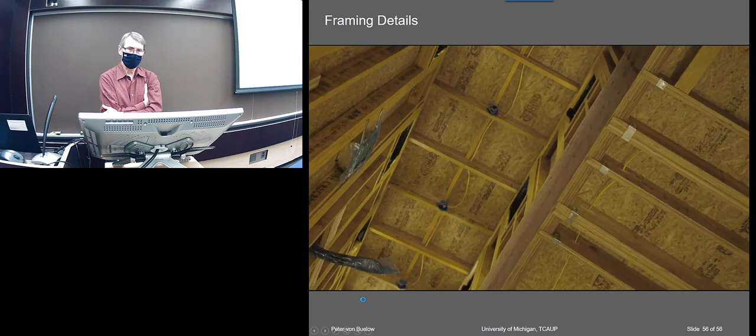Exactly. In my opinion, continuous plywood or OSB sheathing should be standard practice on all homes. I totally agree. It's so much better from a structural perspective, but also when it comes to water and air holdout, and being able to have something to apply a sheet-applied product, a fluid-applied product, or a tape product. So now I've got a really efficient house and a really airtight house. Totally different.

Whit, really appreciate it, man. This is my current house under construction. Whit's actually here working today, checking out my final inspection for framing. We're making sure that everything was done to Whit's standards and met the engineering that he designed for my house. Any last words about the construction we did here? No, it's a beautiful house, excellent framing job. It's been a pleasure to be a part of it. Man, I really appreciate it, Whit.